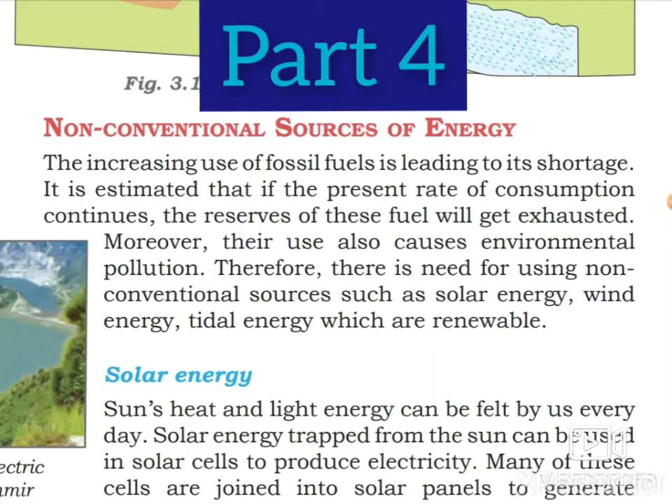Hello students, good morning. After getting clear with the conventional sources of energy, the last topic of this chapter is non-conventional sources of energy. Non-conventional means traditionally we are not using these sources of energy, but because of scarcity of conventional sources we need to turn to this, and these non-conventional sources of energy are cheaper, easily available, and we can use it. They are renewable also, like solar energy, wind energy, tidal energy. So let us get understanding about non-conventional sources of energy.

The increasing use of fossil fuels is leading to its shortage. In previous class I told you that because of population increase and demand increase, we need more and more energy sources. So fossil fuels are leading to its shortage. It is estimated that if the present rate of consumption continues, the reserves of this fuel will get exhausted. Since their formation time is too long, whatever reserves we have built up over all these years will get exhausted soon.

Moreover, their use also causes environmental pollution. Like hydroelectricity also has its disadvantages. Even coal and petroleum also have disadvantages, and they also create an effect on the environment. Therefore, there is a need for using non-conventional sources such as solar energy, wind energy, tidal energy, which are renewable, easily available, and with some mechanism we can generate electricity. Right? So let us see all this.

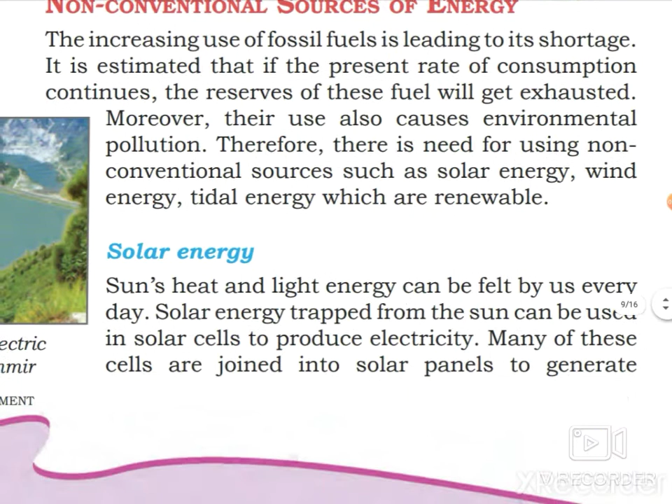There are solar energy, wind energy, nuclear power, geothermal energy, tidal energy, and biogas. So these all 6 types of non-conventional sources you will learn in this topic.

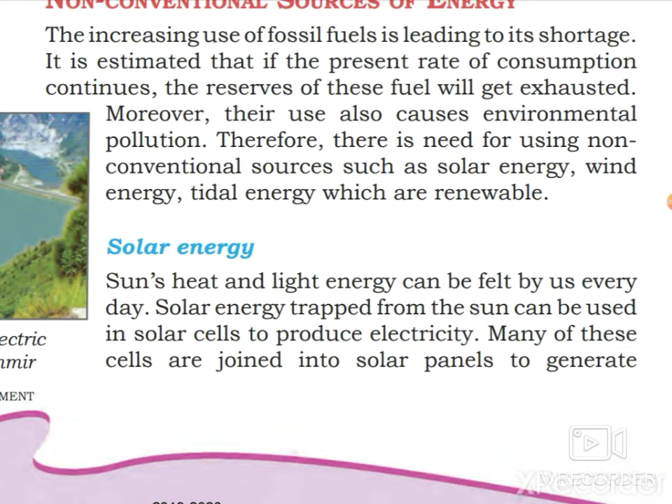Number 1 is solar energy. Sun's heat and light energy can be felt by us every day. We all know how this scorching heat and its light is. So why not use it in a positive way? Solar energy trapped from the sun can be used in solar cells to produce electricity. You must have seen that solar cell, and you must have seen panels also. And now during the trips also you can visit the solar panels and solar park also.

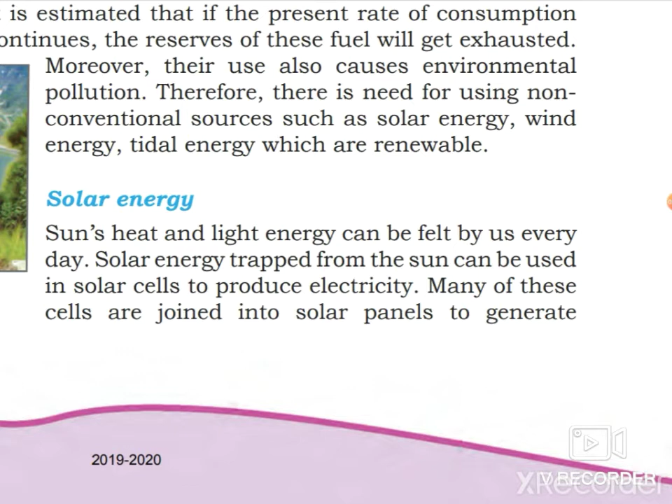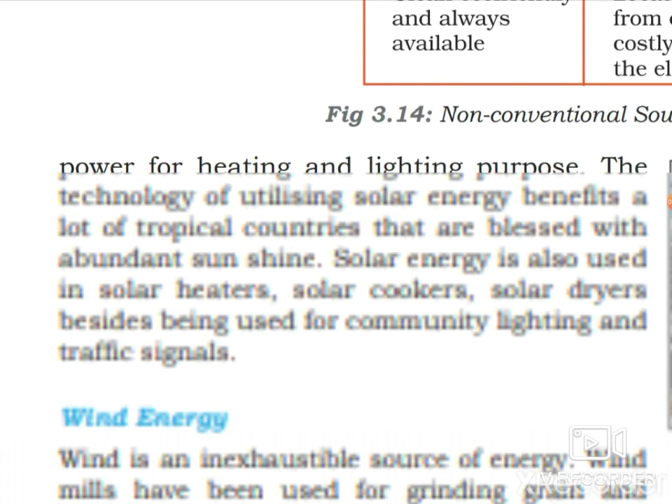Many of these cells are joined into solar panels to generate electricity for heating and lighting purpose. And you can see in Rajkot so many poles connected with solar panels. So during the daytime they are generating electricity, and at night the street light is running on that solar energy.

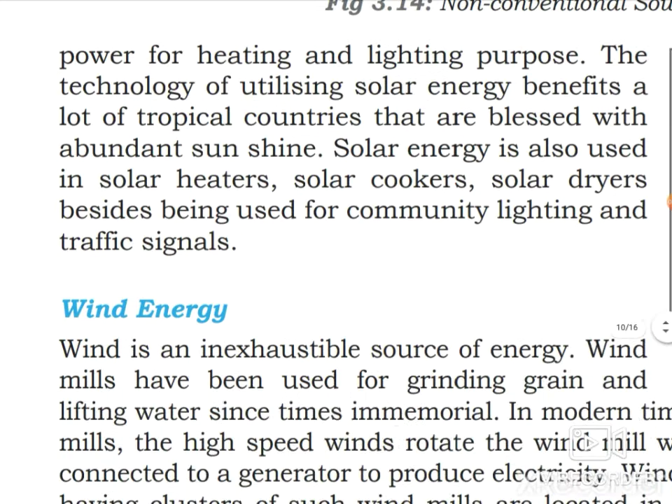The technology of utilizing solar energy benefits a lot of tropical countries that are blessed with abundant sunshine, tropical countries like India also. Most of the around 8 to 9 months we have scorching sun heat and energy and light, so we are using this to convert into energy. Solar energy is also used in solar heaters, solar cookers, solar dryers, besides being used for community lighting and traffic signals. Before we start wind energy, here in this next page they have given solar cooker, about solar cooker.

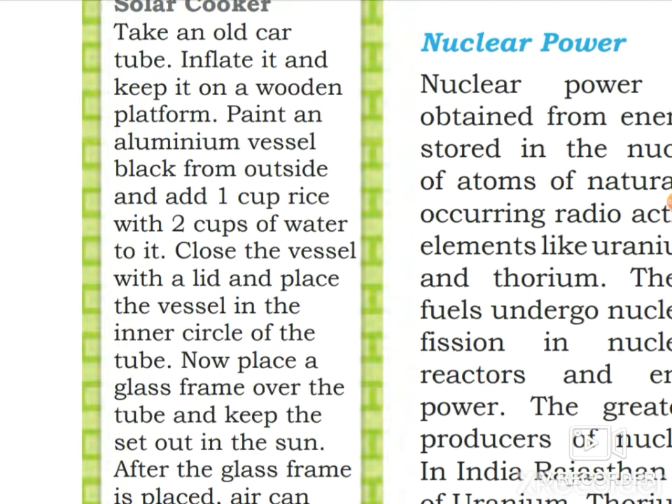So let us read it how it is happening. They have given here in activity form, solar cooker: take an old car tube, inflate it and keep it on a wooden platform. Paint an aluminum vessel black from outside and add 1 cup rice with 2 cups of water to it. Close the vessel with a lid and place the vessel in the inner circle of the tube. Now place a glass frame over the tube and keep the set out in the sun.

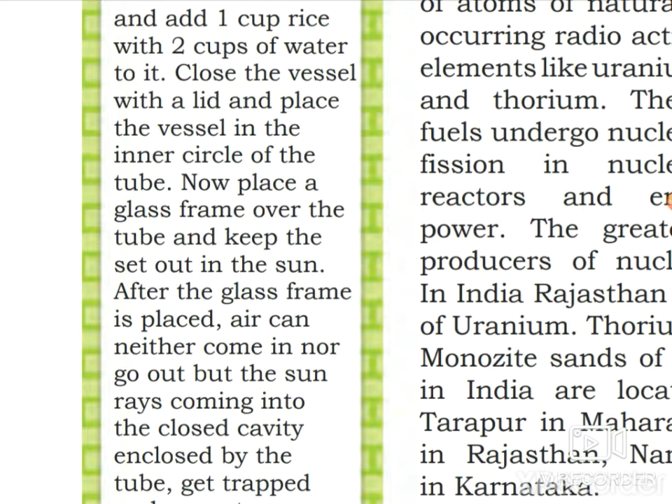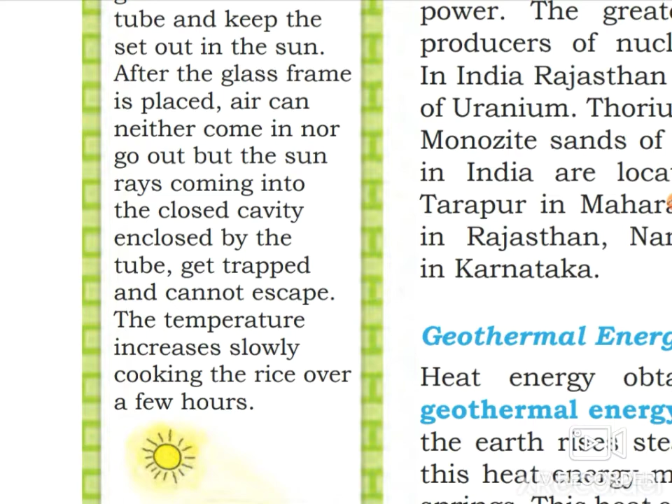Here they are just telling you to do it as an activity form, but you must have seen a solar cooker. An aluminum box is there, and the vessel inside the solar cooker is painted black - aluminum vessel only, painted black, so it can easily trap the energy, and it is covered with the glass lid. So the glass will trap the sun's energy and it will go to the food, and then the food will cook. In this way they trap it and it cannot escape. The temperature increases slowly and then it will cook our food. This is the mechanism in solar cooker.

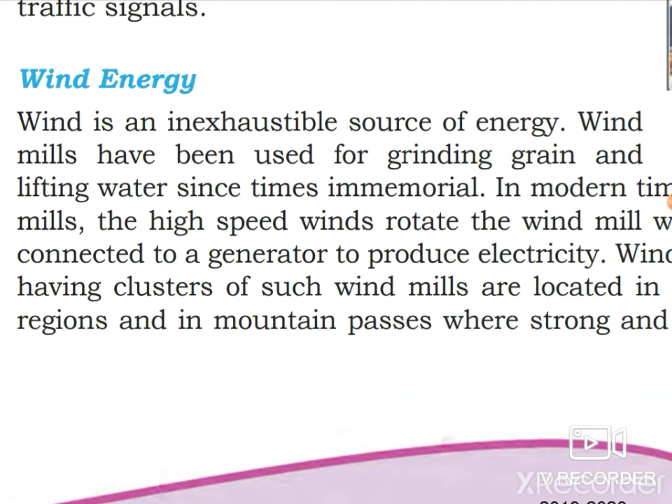Second non-conventional source is wind energy. You all know the power of wind, right? Wind is an inexhaustible source of energy. Windmills have been used for grinding grains and lifting water since times immemorial - from a long period of years we are using wind energy for grinding grains and lifting water. In modern times, windmills: the high speed wind rotates the windmill which is connected to a generator.

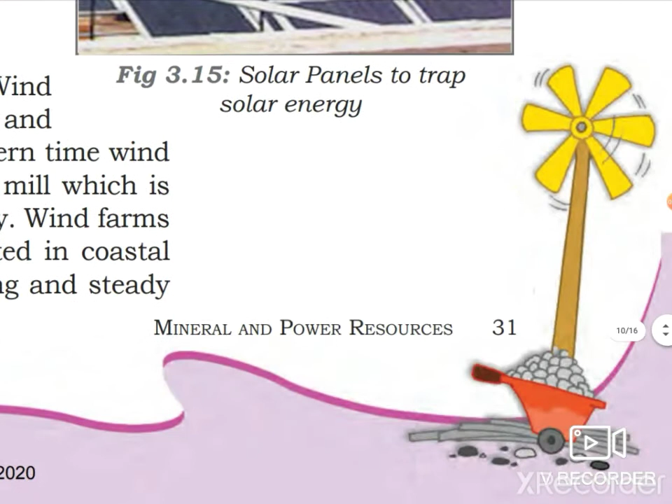Like you remember in the last lesson I explained to you hydel energy - here also they put the wind farm. So they put fans in the coastal areas or windy areas.

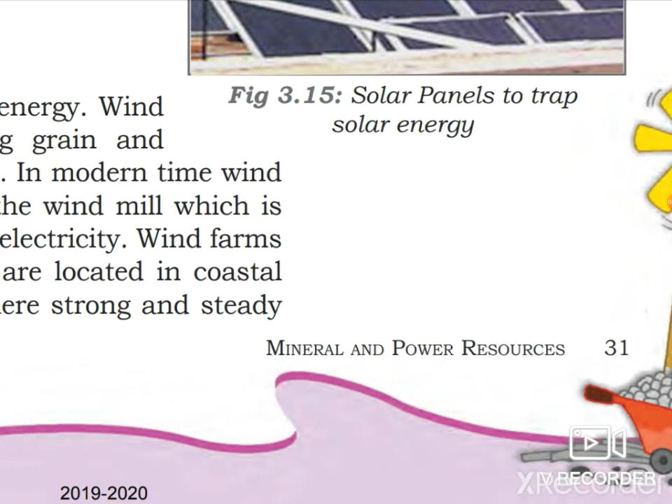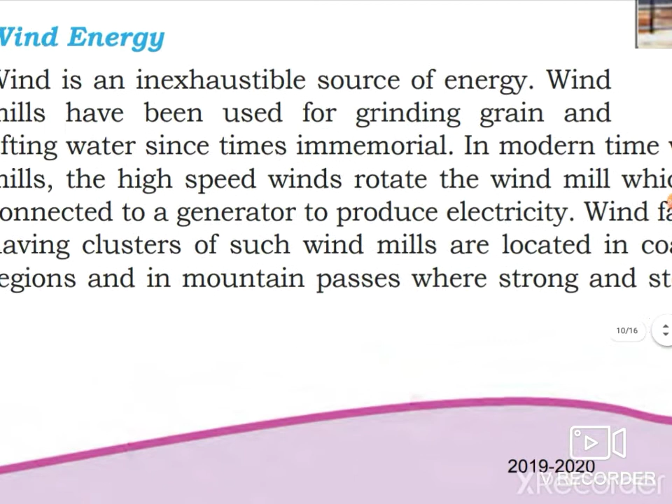This fan will run through the wind and it is connected with the generator. When the blade moves, it will start generating electricity. Here you can see the high speed wind rotate the windmill which is connected to a generator to produce electricity. Wind farms have clusters of such windmills, and all these windmills run through the wind, and when they are running, that generates the electricity.

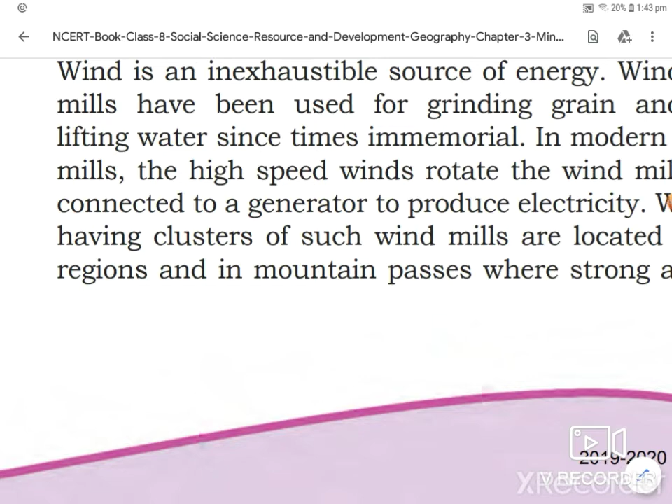Windmills are located in coastal regions and in mountain passes where strong and steady winds blow. Wind farms are found in Netherlands, Germany, Denmark, UK, USA and Spain, noted for their wind energy production. In India also we have many wind farms near coastal areas, in Tamil Nadu and Gujarat. If you go to any coastal area you can find so many windmills standing. It is always connected with the generator and it generates electricity.

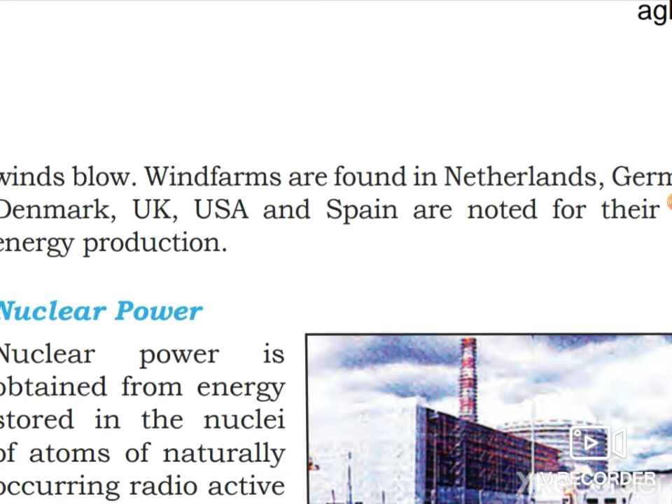Number 3 is nuclear power. Nuclear power is obtained from the energy stored in the nuclei of atoms of naturally occurring radioactive elements like uranium. You must have learned this in science also, right? In the nuclei of atoms there is always energy. So here it is given that nuclei of atoms of naturally occurring radioactive elements like uranium and thorium, these fuels undergo nuclear fission in the nuclear reactor and emit power. Meaning they are breaking that energy inside the nuclei, and through the reactor they emit power.

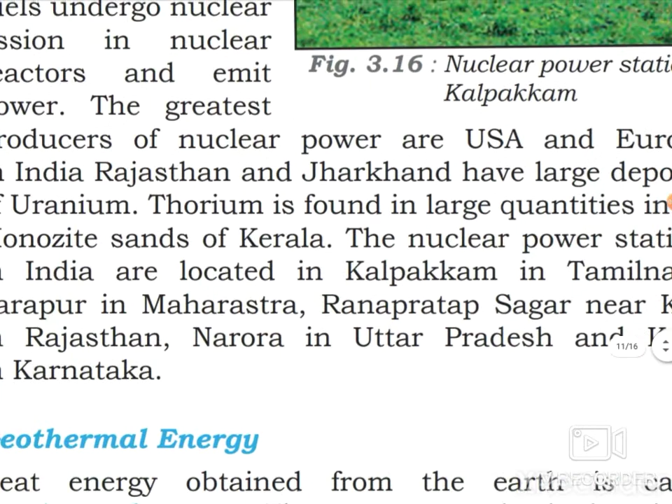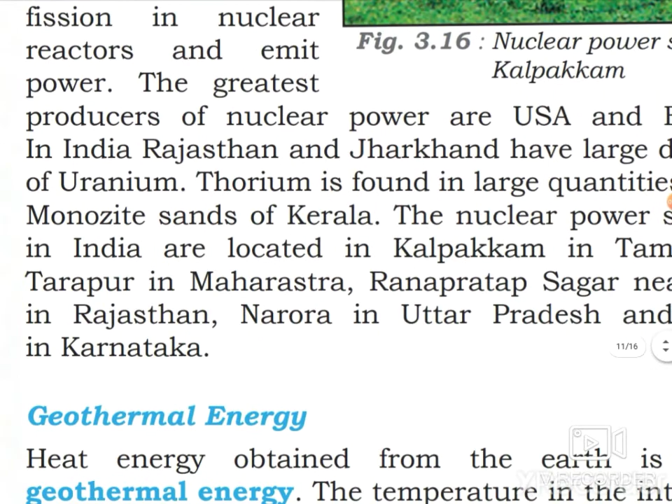The greatest producers of nuclear power are USA and Europe. In India, Rajasthan and Jharkhand have large deposits of uranium. Thorium is found in large quantity in the monazite sand of Kerala. The nuclear power stations in India are located in Kalpakkam in Tamil Nadu, Tarapur in Maharashtra, Rana Pratap Sagar near Kota in Rajasthan, Narora in Uttar Pradesh, and Kaiga in Karnataka. So these are all the areas where potential of uranium and thorium are found, so there is a possibility of nuclear power generation.

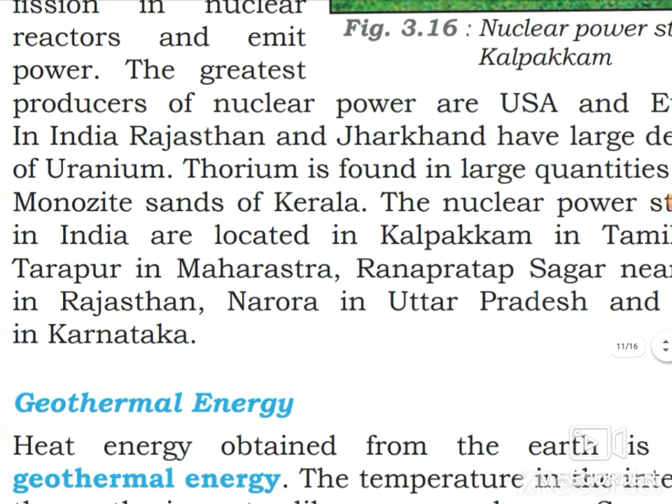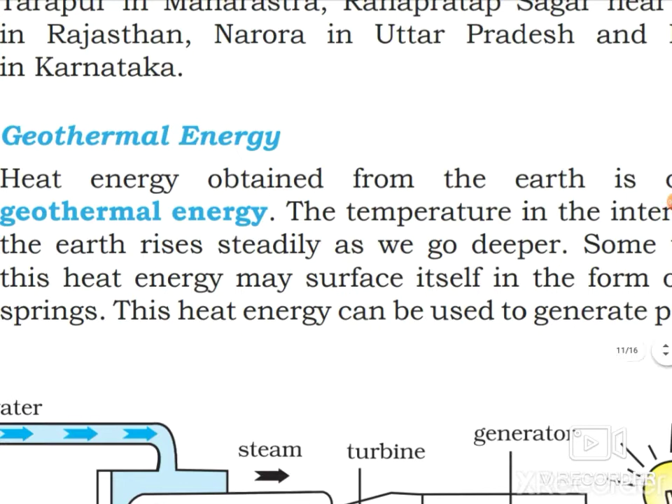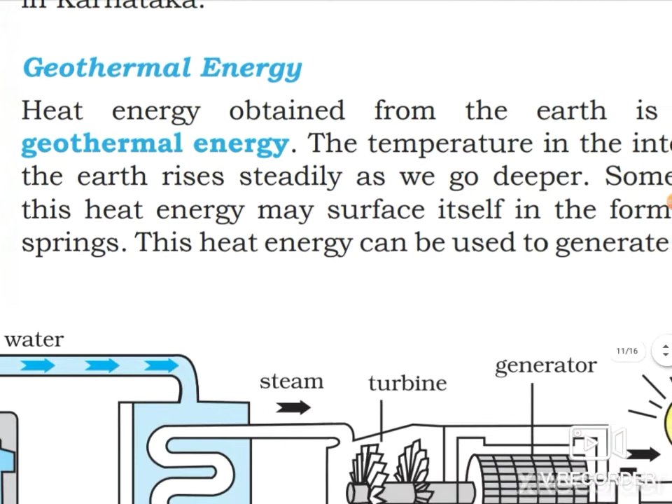Next is geothermal energy. Heat energy obtained from the earth is called geothermal energy. You all know this mechanism. Deep inside the core, molten magma is continuously moving and it generates lots of energy. The temperature in the interior of the earth rises steadily as we go deeper. Sometimes this heat energy may surface itself in the form of hot springs. Deep inside the core, heat is continuously increasing, and sometimes this heat energy comes to the surface in the form of a spring. This heat energy can be used to generate power.

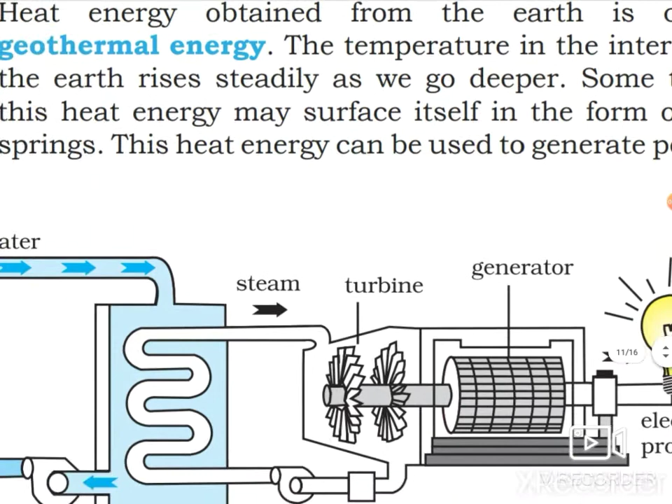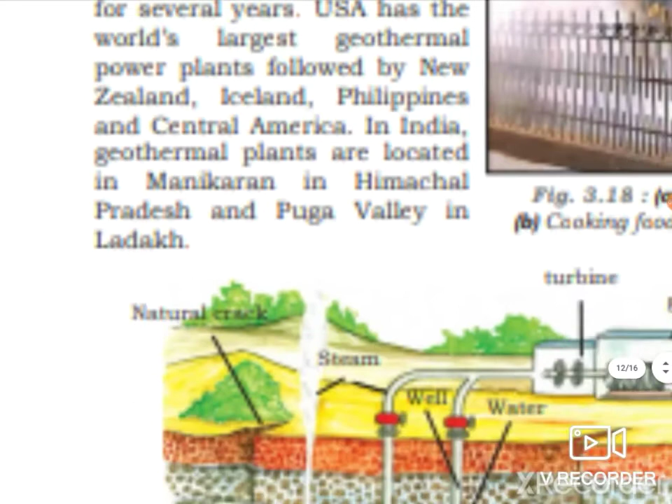Geothermal energy in the form of hot springs has been used for cooking, heating and bathing for several years. USA has the world's largest geothermal power plant, followed by New Zealand, Iceland, Philippines and Central America. In India, geothermal plants are located in Manikaran in Himachal Pradesh and Puga Valley in Ladakh.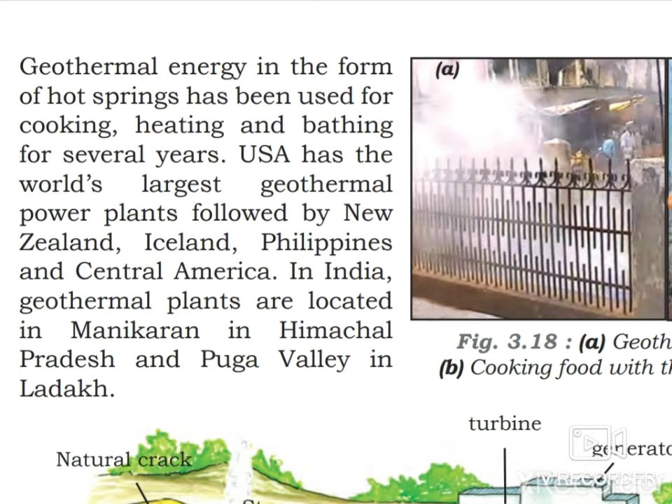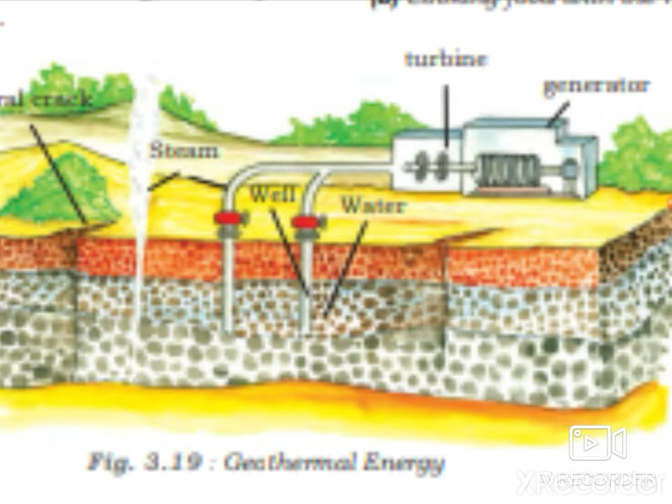Now let us first understand this mechanism of geothermal. You can see here the pipes are fit deep inside the earth. When this inside energy comes in contact with water, since it is connected with water, it comes up to the surface in the form of steam, and through this the turbine moves and it generates electricity.

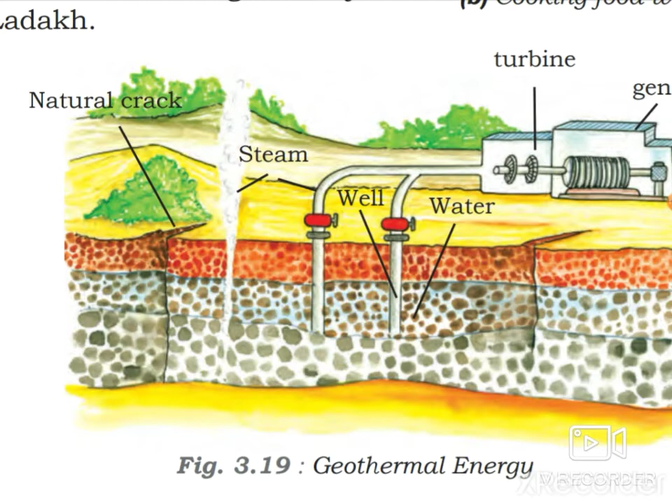Now it is clear. See these cracks on this wall, it's because of the energy inside, because of the heat and pressure from the core, and it creates this natural crack, and it comes out in the form of hot spring, and due to this spring the turbine moves and generates electricity. This is the mechanism of geothermal.

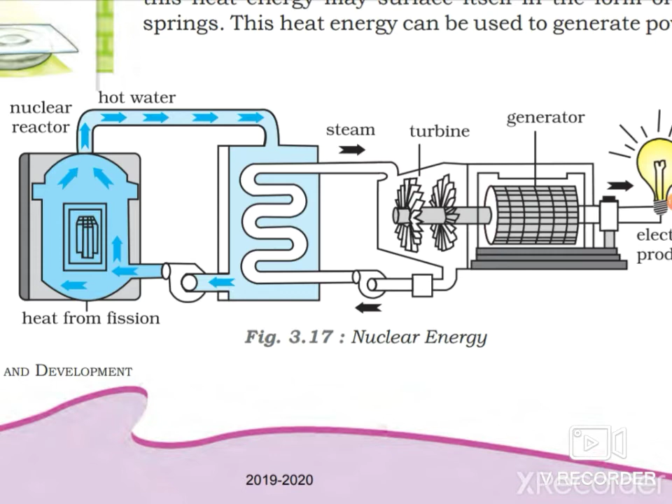The previous diagram was of nuclear energy, can you see it now? Nuclear energy generation: here you can see that the nuclei of the atom is breaking here, in the nuclear reactor. Here you can see one pipe is attached for the hot water, and from that power, the fission of that nuclei generates the power. Again the same turbine will move and it will emit the energy. See, you can see that bulb, electricity is produced and the bulb lights up. Okay, so this is nuclear energy, hope it is clear.

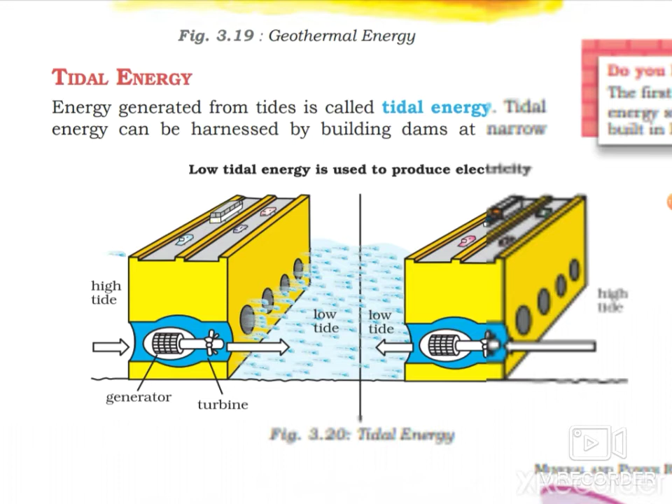Next non-conventional power resource is tidal energy. As seen in hydel power, hydel electricity, using the ups and downs of tides, we can generate electricity. Energy generated from tides is called tidal energy. Tidal energy can be harnessed by building dams at the narrow opening of the sea.

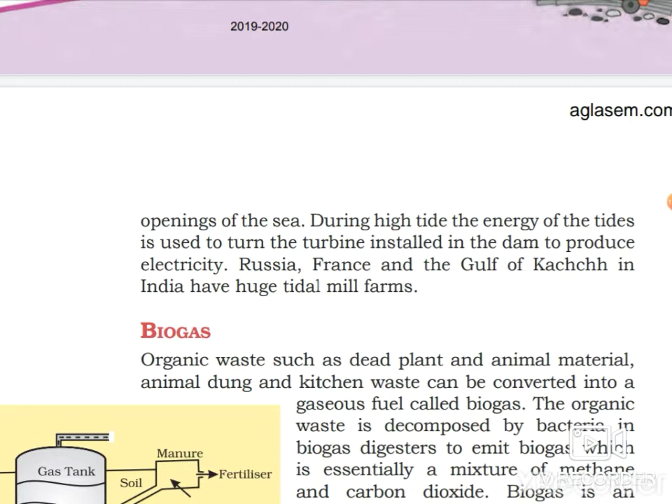Tides in the sea, and somewhere there is a narrow opening, they build a dam-like structure, and when tides move up and down, that turbine will move and create electricity. During high tide, the energy of the tides is used to turn the turbine installed in the dam to produce electricity. Russia, France and the Gulf of Kachchh in India have huge tidal mill farms. You can see here in the narrow opening of the sea, they have constructed this dam.

High tide and low tide is the most important feature of sea waves. At high tide, when the water falls on this turbine, the turbine will move and generate electricity.

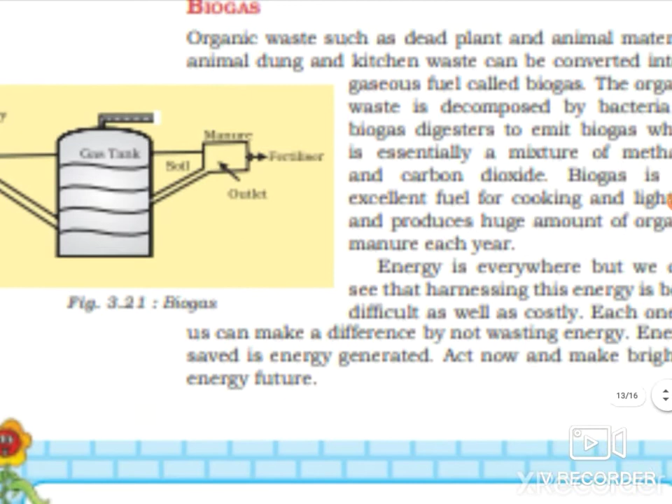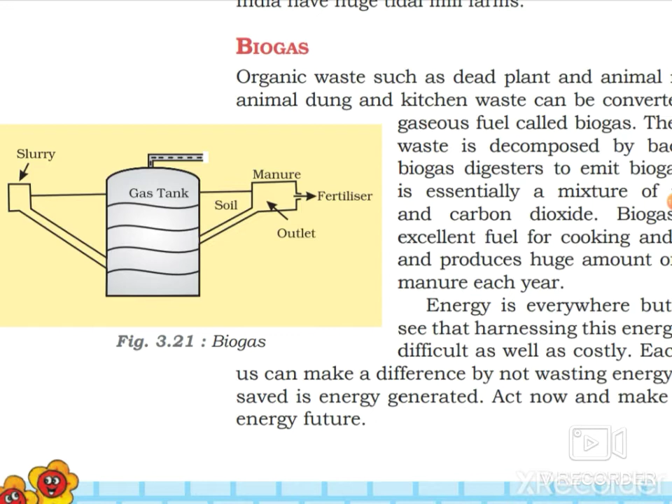And the last one is biogas. Here you can see they have put a tank inside the earth, and all this manure they collect from it, and gas is also collected from this pipeline. Organic waste such as dead plant and animal material, animal dung and kitchen waste can be converted into gaseous fuel called biogas.

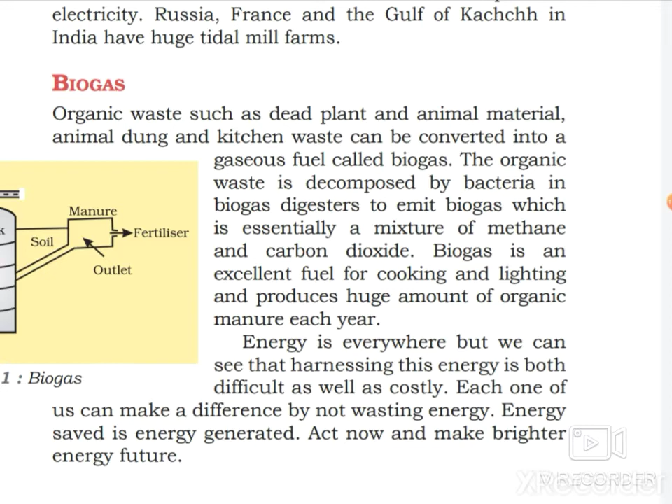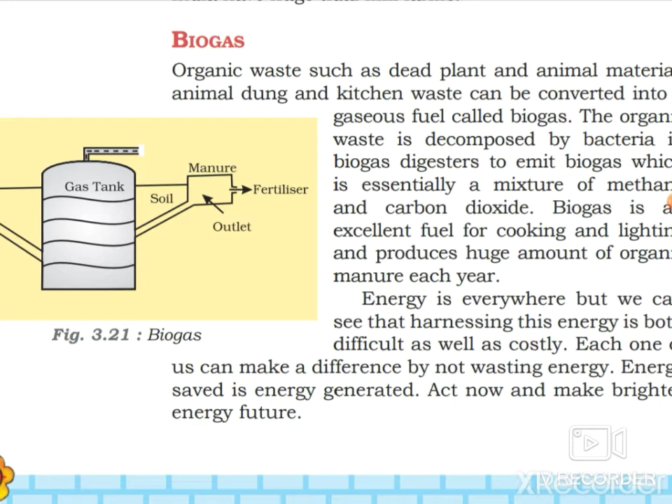The organic waste is decomposed by bacteria in a biogas digester to emit biogas. Here you can see that all this waste is put in a tank prepared inside the earth, and it is allowed to decompose. After decomposing, methane gas is created, and carbon dioxide also. So this digester emits biogas, which is essentially a mixture of methane and carbon dioxide.

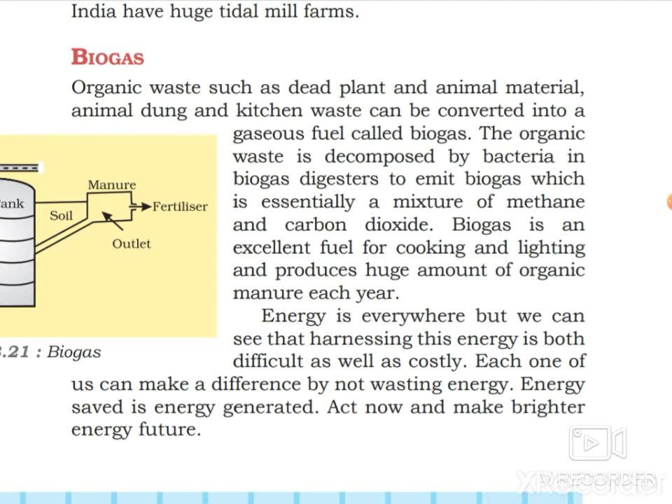Biogas is an excellent fuel for cooking and lighting and produces huge amounts of organic manure for farms. It is not only giving us energy for cooking and lighting, but it also gives us very important organic manure for our agriculture, for our farming.

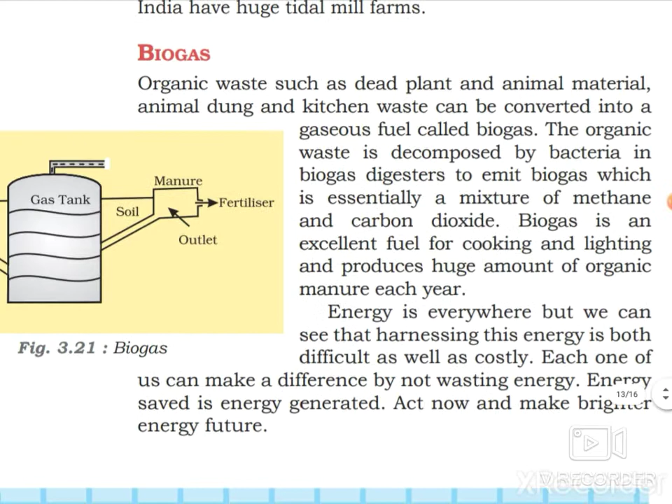So this is how you learn about all these non-conventional resources: solar energy, wind energy, tidal energy, nuclear energy, geothermal energy and biogas. Now it is a need of the time that we save all these resources, whether conventional or non-conventional, because all these have a limited stock, and all these require some technology also. Energy is everywhere, but harnessing it is both difficult and costly also.

Suppose if we are talking about renewable resources like hydel power or tidal energy — unlimited sources are available, but harnessing this electricity is costly. So whatever sources we are using, we need to check our usage and save the resources.

Each one of us can make a difference. We cannot say, I am resourceful, I can use my resources according to my power. No, each one of us can make a difference by not wasting energy. Energy saved is energy generated.

Act now and make a brighter energy future, because future generations cannot be deprived of these important resources, as they also need them. If we save in the present, we can save for the future. Sustainable development can be done through us only.

We cannot say we are resourceful, so we can use resources according to our pocket. No, resources are limited, whether you are using non-conventional or conventional. Conventional has its own advantages and disadvantages. Non-conventional also, no doubt, has mostly advantages, but the technology cost also counts. So we need to think twice before using any resources from nature.

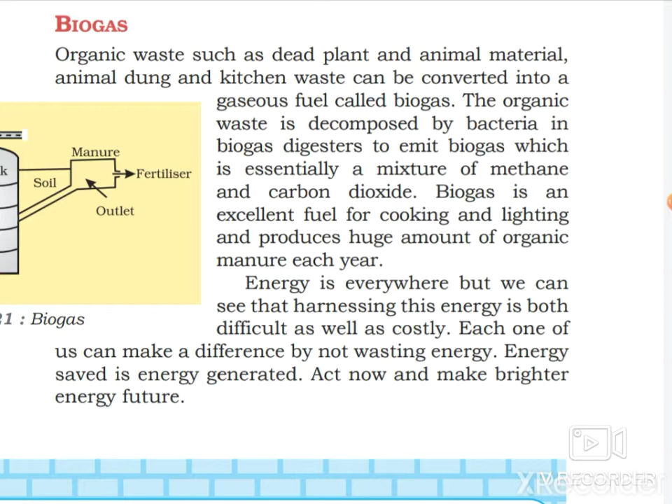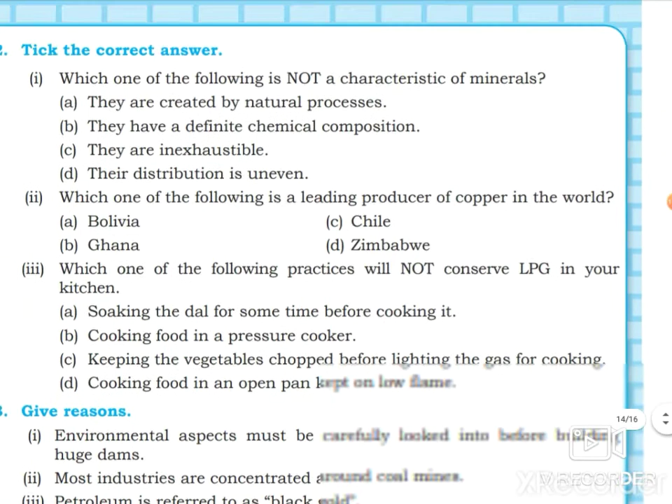And diagrams — let me tell you which diagrams you have to do: geothermal energy, nuclear power energy, and hydel power. These three diagrams you have to draw in your book as classwork when you do the exercise of this chapter.

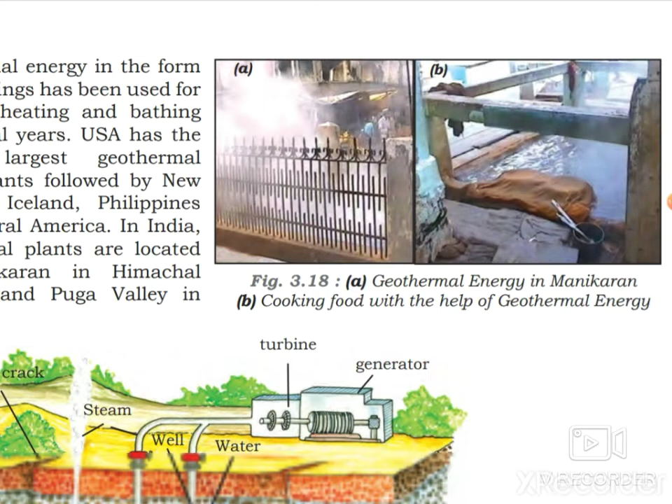Global warming and air pollution are two effects of society's dependence on conventional sources of energy. Hence, there is a primary need to use non-conventional sources of energy like nuclear energy, solar energy, wind energy, tidal energy, biomass energy, geothermal energy, etc. These sources of energy are abundant, renewable, pollution-free and eco-friendly. These are also called renewable sources of energy. Let us study about the various non-conventional sources of energy.

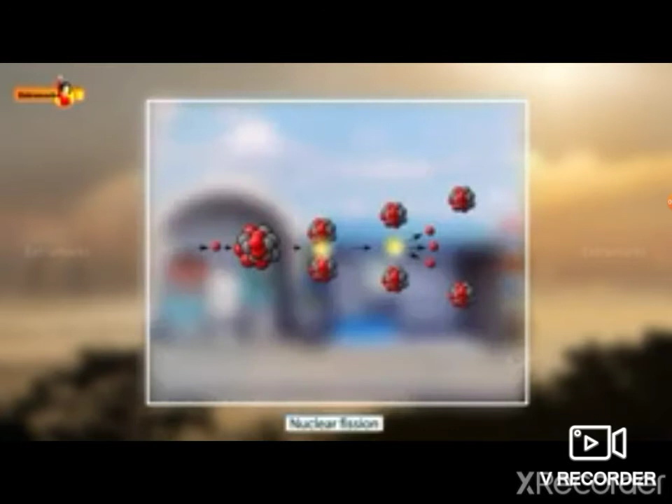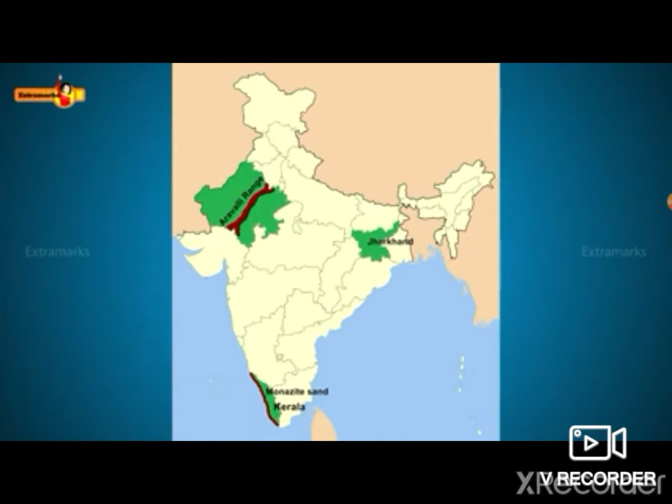Nuclear energy is produced when the nuclei of atoms of elements are either split or combined. This process is also known as nuclear fission and nuclear fusion. Uranium and thorium, which are available in Jharkhand and the Aravalli ranges of Rajasthan, are used for generating atomic or nuclear power. The monazite sands of Kerala are also rich in thorium.

Solar energy. India is a tropical country. It has enormous possibilities of tapping solar energy. Photovoltaic technology converts sunlight directly into electricity. Solar energy can be used for various purposes like cooking, power and electricity generation, and transportation.

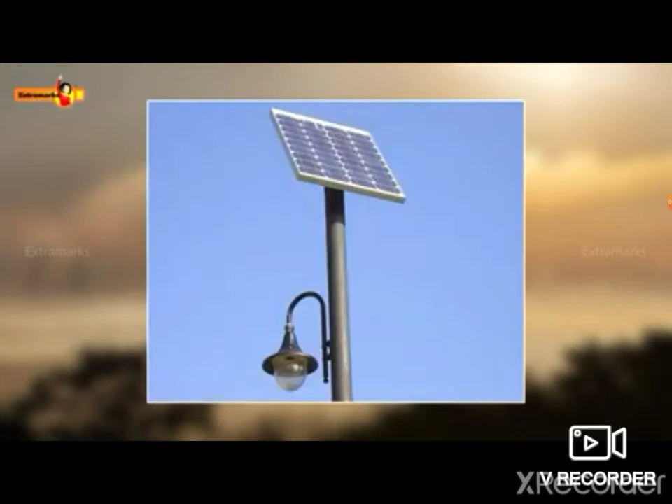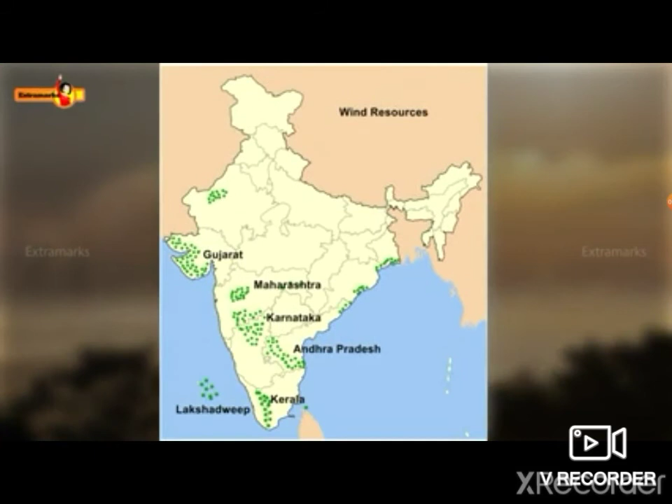Wind energy is the second fastest growing source of electricity in the world. India is one of the major producers of wind power. To make electricity from wind, energy companies use large windmills called wind turbines. The largest wind farm cluster in India is located from Nagercoil to Madurai in Tamil Nadu. Other wind farms are located in Andhra Pradesh, Karnataka, Gujarat, Kerala, Maharashtra, and Lakshadweep.

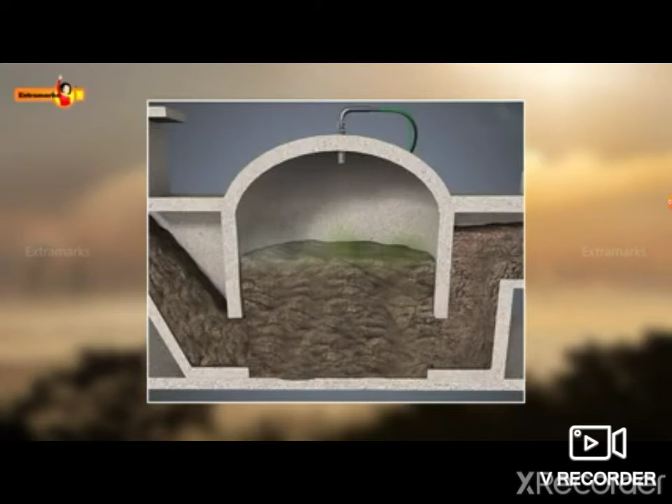Biogas is another renewable energy that can be used to fulfill the energy requirement of the people. The sources of biogas are shrubs, farm waste, animal and human waste. Biogas is produced by the process of decomposition of organic matter. The plants using cattle dung are known as gobar gas plants in rural India. These plants provide energy and improved quality of manure.

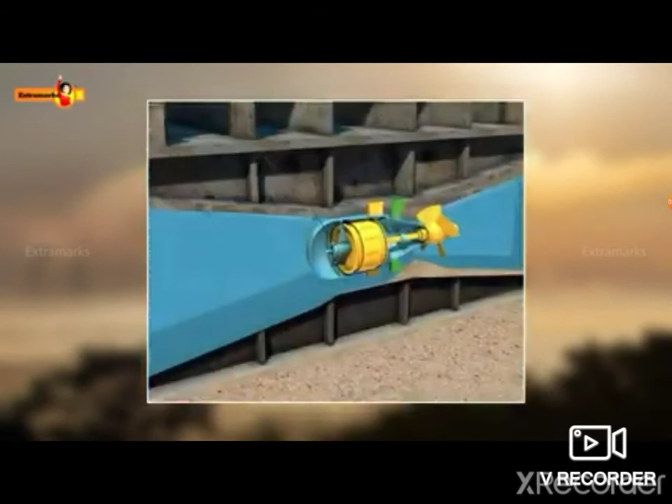Oceanic tides can be used to generate electricity. Tidal energy is produced from the rise and fall of the ocean water during tides. It is used in areas where the difference between the rise and fall of the water is large. It includes the following steps: floodgate dams are built across sea and ocean inlets. During high tide, water flows into these inlets and gets trapped. After the fall of the tide, water retained by the floodgate flows back to sea via a pipe that carries it through a power generating turbine.

Geothermal power plants use superheated fluids from the Earth's geothermal resources to generate electricity that spins turbines on a generator. Two experimental projects have been set up in India to harness geothermal energy. One is located in the Parvati Valley near Manikaran in Himachal Pradesh, and the other is located in the Puga Valley, Ladakh.

Conservation of energy refers to efforts made to reduce energy consumption and to increase efficiency of energy use. Conservation of energy resources is inevitable. The rising consumption of non-renewable energy resources will finish them, and they will not be left for our future generations. We should take the following steps to conserve energy resources.

Developing a sustainable source of energy. Promoting energy conservation. Increasing the use of renewable energy sources. Saving electricity and using power-saving devices, etc. There are a number of methods that won't cost you anything, but they will save money.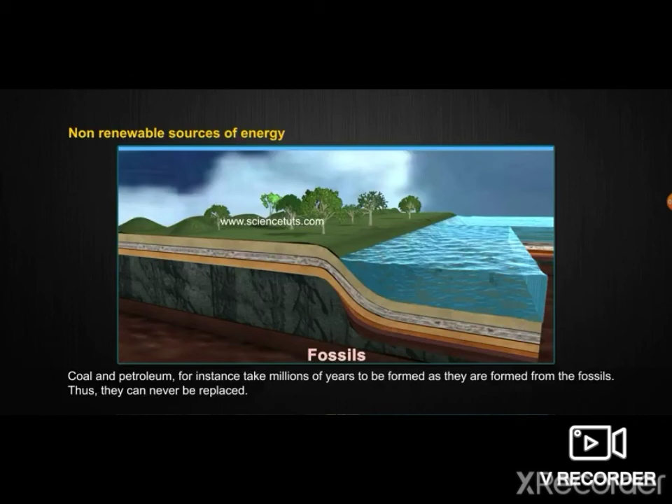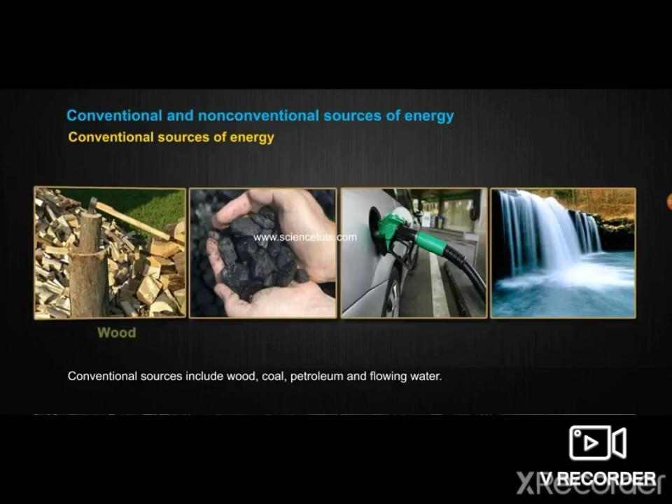Let us discuss about conventional and non-conventional sources of energy. Conventional sources of energy are sources that have been in use for centuries. Conventional sources include wood, coal, petroleum, and flowing water. Conventional sources like coal and petroleum are non-renewable, while sources like flowing water are renewable.

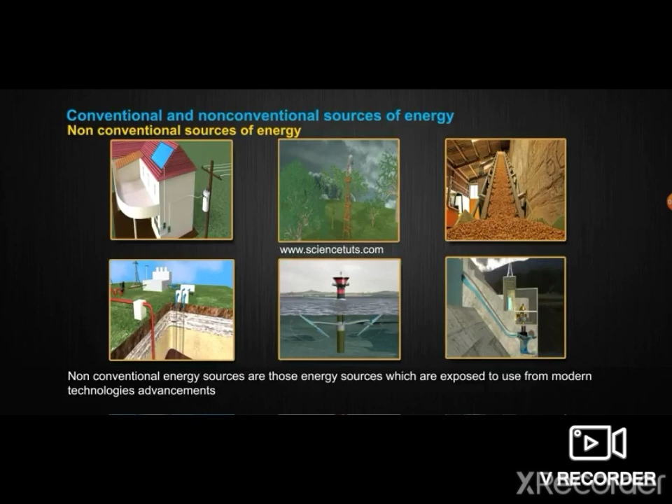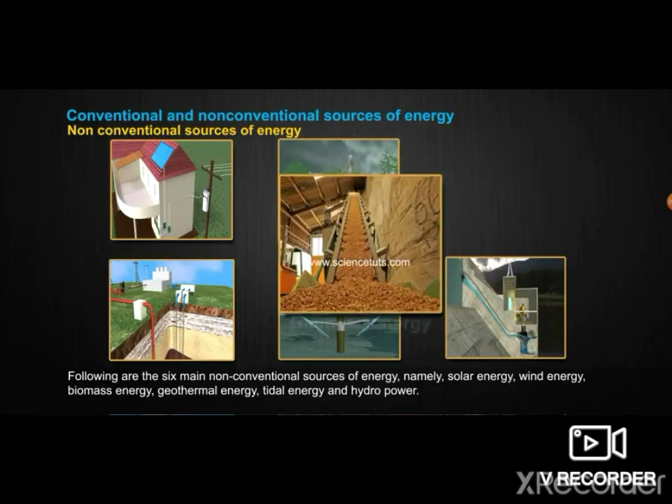Non-conventional sources of energy are those energy sources which are exposed to use from modern technologies and advancements, rather than the normal use of conventional fuels as energy sources like gas or oil. Following are the six main non-conventional sources of energy: solar energy, wind energy, biomass energy, geothermal energy, tidal energy, and hydropower.